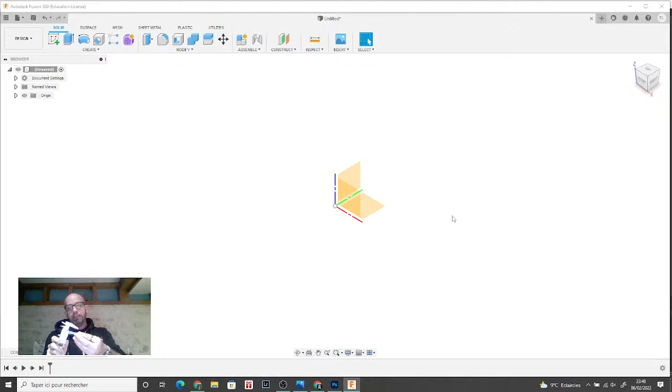So I have a blank page on my Fusion. I show the origin, modeler's best friend, the calipers, a pair of calipers, and first thing I want to measure the actual footprint of my part, and maybe not drop it on the floor at the very beginning of the video. So I want to have a footprint of my part.

I want it to have 16.5 millimeters from the top, from a side to another one, and the bottle itself is 13.3 millimeters, and the connection hose, valve, and we'll see what we can add on it will be the difference. So I'm going for 16.5 millimeters, and so I choose a face.

So I'm really starting from blank. I did it myself not to think about the project so that we can think together, and so I'll put my measure first on an axis. So now I'm trying to anticipate the positioning of my part with the origin, because I see there are some symmetries happening, so I will maybe need some mirroring, or there might be a clever position to set my part.

So let's say my bottle is 13.5, so I'll try to center my bottle on 13.5. So okay, I'm starting a sketch here. I'm going to put just a construction line at the beginning, and 13.5. Cool thing for beginners is that you can set calculations in the measuring field. So 13.5 divided by 2, right? So I should have half a bottle on this length, right?

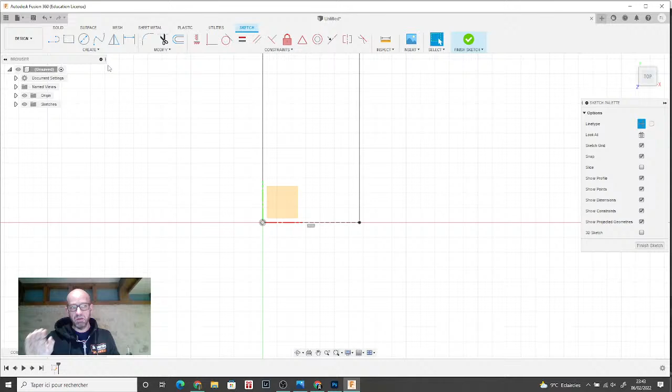We could either start with a cylinder and add a sphere on each side, or half a sphere on each side, or sketching a profile and revolving it around, which is my favorite option, because this way we could also decide which curve we will be following for the rounded top, instead of just getting a dumb circle or a sphere where we couldn't control the actual slope.

So let's go. We need also a diameter. Diameter is 4.75, let's say 4.8. So the radius is 2.4. Okay, I have a radius of 2.4. So here we go, my radius, 2.4. And now I'm going to make a horizontal line, which I'm not constraining. Don't set a distance, get a spline, and I'm going to set my curve. For instance, just need a few points on the spline.

And now I'm going to constrain. I want my spline to get flush with the body, and for that I'm going to hit escape, grab the handle of the last point of my spline, and if I want to finish my line flush with the body, I'm going to constrain my handle here parallel. Why not? That's a good start. I want you to be parallel with you, right? Okay, so that I'm sure whatever I do with the other points, I will be getting a flush line here, right?

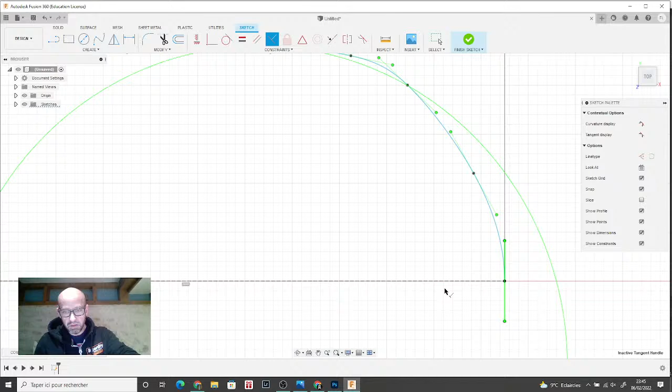And now I want as well this one to be perpendicular. I think it did it already. Okay, that's a good start.

We have a Fusion crash, right? That's how you start a live stream. What's happening? Hopefully it arrived in the very early stage, so let's start again. Fusion 360. That's how you start a live stream. Normally it's not my laptop performance, because I just upgraded my laptop a few days ago and added some memory to it. I'm at 32 gigabytes. Yes, Jared, isn't it how you start a stream?

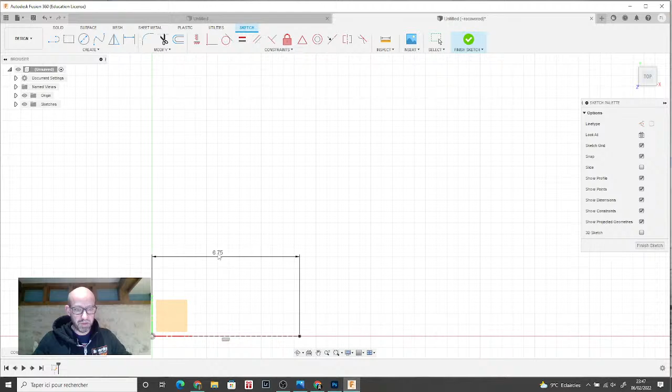I have a recovery file. Thank you, Fusion. Let's see. Yes, I just have my construction line. All right. So let's get back into it. Just going to go into the edit of my sketch. Have a measure. Okay. You come down. Okay. Just checking with measure. Yep. So my radius, I lost my radius in the accident. 4.8, that's 2.4 millimeters. Let's get back into it. 2.4, and

it's not very different from modeling on the bench. Even on Fusion you need a little bit of warm-up before triggering and igniting and getting into your thing. So just need a few points, don't need that many points. A common mistake I did and still do is making splines with too many points. Don't need that many actually to make nice curves. So I want that end handle to be parallel. Okay, and now I have constrained both sides of my spline. I can play with my points. Let's see.

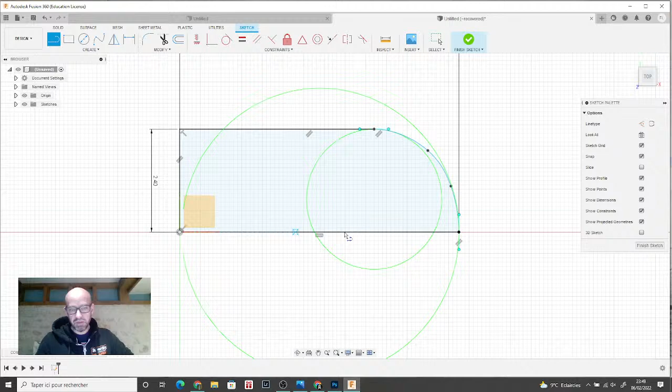Right, not bad. And to try to keep it simple and really newbies oriented, I need to make a closed sketch to be able to perform a revolution. And you see my sketch is closed. It's been taking a blue hue. It means that my sketch is closed. I can work some extrusions out of it or some revolvings. So I'm not going any further with this sketch. We'll be able to come back into it and do some improvements because I just had an idea.

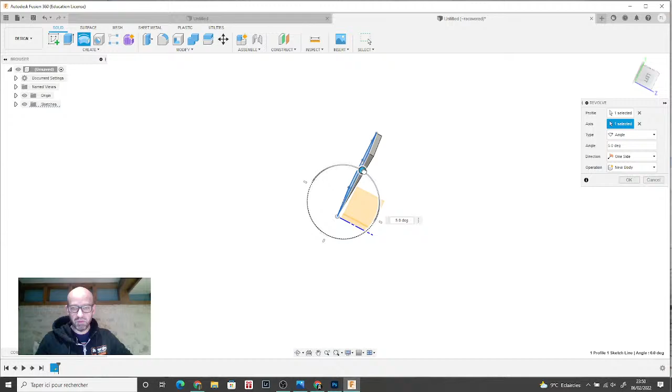So finish sketch. So if you entered my mindset, you see it's going to be half a bottle. So Fusion has been understanding that I want to use this profile. The axis is the center line, and here we go. We have a new body. I performed my revolving on 360 degrees, and that's a parameter you could choose if you like. Sometimes, if you have assembly notches or anything, making partial revolutions can be helpful. So here I'm going to full, right?

Okay, and just to show where I'm going for beginners, I'll be mirroring this body. My mirror plane will be that one, or I could use as well that one, and you see a bottle will happen, right? So further detail on the bottle, I have two straps turning around my bottle. Those straps will be also some locating plugs on the brackets which are on the roof, and I want to have better straps than those ones because they are a bit soft, and I think we could add some interesting features on them.

So as I have half a body, I cancel the mirroring and I'll make one strap, and with one mirroring I'll have my second strap, and there would be several possibilities to make the straps. I can, for example, displace a plane along the center line and draw a circle with a larger diameter and extrude it so that a strap can appear. Or what I can do as well is come back into my sketch and revolve a strap around the same axis.

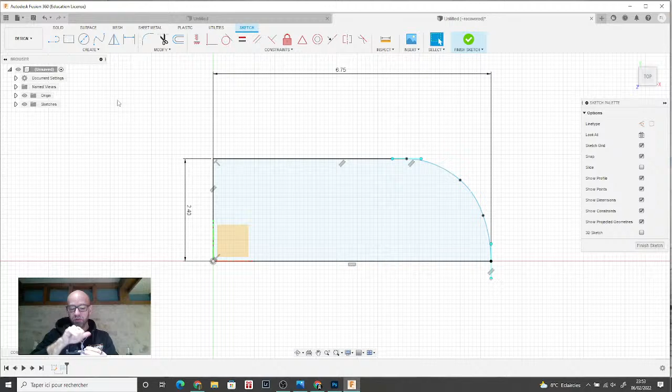The main opening of the well is above that section. There's a very narrow opening, and leg struts, so this area will be almost blinded. So I'll be concentrating on this area of the well, and a yellow bottle would be a nice feature around the green mess of pipes and everything. So I want to make some painting work on this bottle, and that block will be a good way to hold it. So a blind face is always a good way to plug in straight the supports, or to make a bit like a pouring block, or a sacrifice part that you could saw off in a second time, or even keep as such, because it's invisible actually.

So we want some straps. A very simple thing will be to add a rectangle here, which is connected to the body. At this stage I'm not constraining it... yes, I'll constrain it, it will be more simple to explain. So as it will be revolving, the height I'm showing will be the thickness of the detail, and the very first visible step when printing would be 0.1 millimeter. At 0.15 you have a good chance to see it and print it decently, and I like to go above 0.25 millimeters to be sure to catch a pin wash and have a nice sharp edge. I want a real thickness for my strap, so I'll go to 0.35 millimeters.

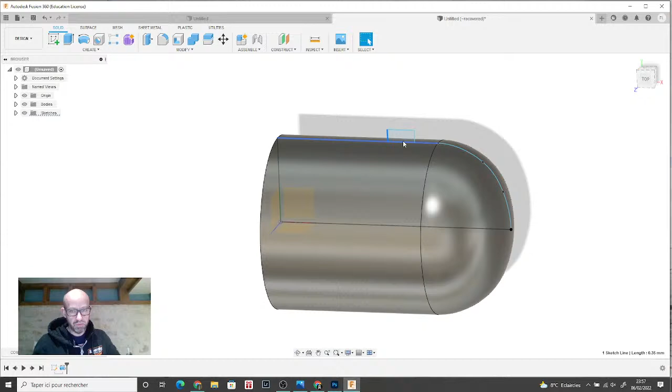Intentionally, I didn't constrain this length so that I can pull here we go, and increase my thickness just by eyeballing, because I don't have any blueprint of this bottle, so eyeballing will be part of the job, actually.

And what do we have next? I have an important feature to keep in mind, which I forgot: the location of the strap. I have my locating bed on the part, 3.3, just checking this. How much do I have? I'm just taking a measure to be sure I fit in my little bed on the part.

Measure from here. Nope. Sorry. Yep, I'm going to do it this way. I just want to check a measure. 3.5, spot on, I'm good. I'll be fitting. Okay.

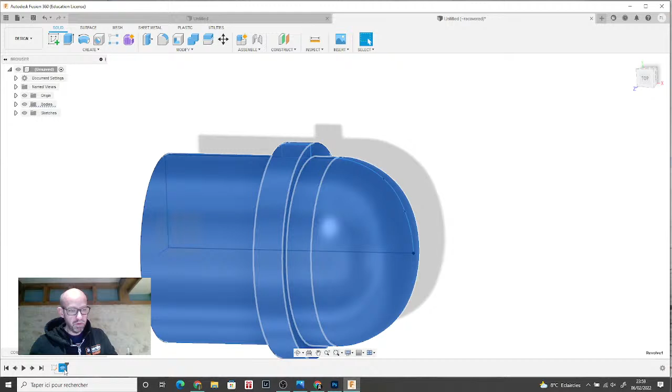I could have made, as I said, the revolution in one step, but I'm going to make it in 2 steps, and so I remove it. Single step. I've been touching something here. Okay, you see here, little.

I have a little mistake in my sketch. The rectangle I did wasn't snapped on the body, so I'm just fixing that up. Okay, I have one sketch, one profile, another profile.

Good, so I want a separate body for my strap, because I'm going to add a few features on the strap and a tightening clamp, those screws that pull on the strap and tighten them, and I don't want them to be perfectly aligned.

Perfectly aligned parts are too honest to be good, so I'll make one strap with its tightening thing and details, and the mirrored one will be mirrored as another body, so that I can rotate it a little bit and give an asymmetry and a more natural body. It won't be anything difficult.

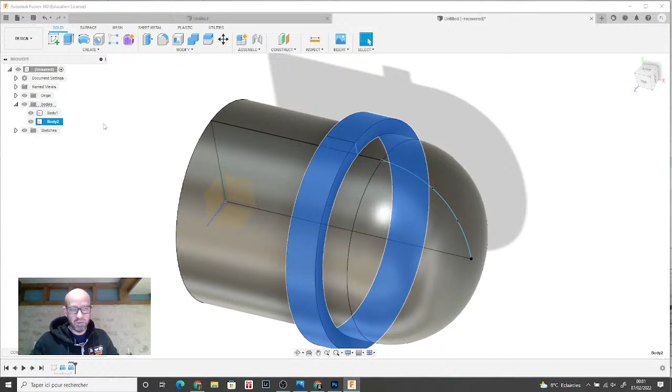Okay, here we go. So checking my bodies. Body 1 is the bottle, body 2 is the strap, right? So our strap is 0.3 millimeters high.

I'm saying that because I'm also thinking I need to keep thinking. As long as you progress, keep in mind you're not modeling the real part. You're modeling a model part, and you want to keep connected with real measures and what will be printable and paintable. You can make superb drawings, but if your details are too fine, they won't show up, and you won't be able to paint them with a good paint separation.

I like to have decent grooves to catch my pin washes. I want to have sharp edges to make nice paint separation. At this stage, I am already preparing my paint stage, and my advice would be for you to do the same, and hopefully this will make sense shortly.

So let's say we want to add a screw on top, so I'm going to set a plane here. I'm going to make it as simple as possible, sort of a cylinder. I'll see, 0.5 millimeters. That's going to be small.

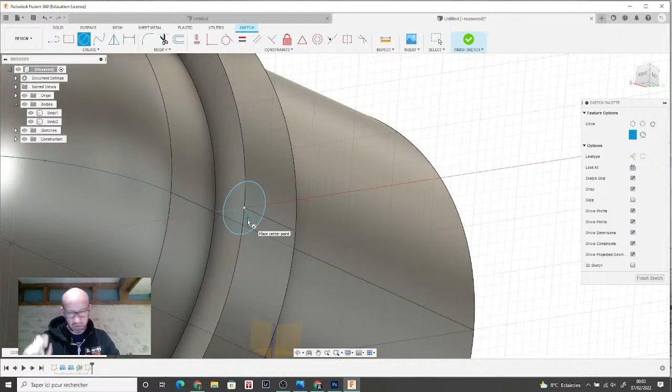We are not at this stage designing a real mechanism, we are schematizing. We are making a suggestion, and we keep in mind we're on a small part in an almost blank area. We are just trying to suggest something happening.

So I'm going to make a larger one, let's see, and I'm going with 0.8, and why not, in case I'm not sure, I'll use that sketch polygon. We'll see if it can make sense. A polygon, or a 6 face head, is always a good way to separate a body from a cylinder.

From a screw, to give a sort of bolt head. It's to give some variation and also suggest there is a mechanism for tightening, or it could be a Phillips head, or a hex head, which is a quite visual thing, and it's easier to show up this sort of head rather than a screwdriver head. So we'll see if we use it.

So I start with that one, I'm going to make a join. You see, right? We're going to use, let's say, the larger profile. I want my hex head, yes, I'm going to take this one up, right? Taking up this one, and looking, 0.3 millimeters is a decent height.

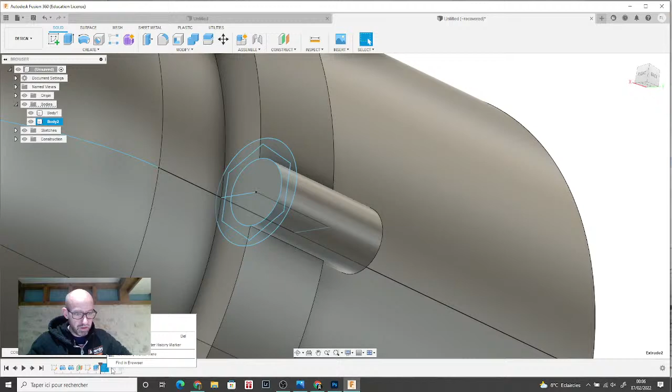I'm going to just hide my bottle so that... okay, just deleting this, and I start without my bottle so that I don't perform any merging of bodies or cuts or anything. Oh, I'm starting back.

0.345, so I'm taking half a mil. Yep, and for this one I'm going to put it at 0.25 so that I have a decent thickness here. I'm giving them as much thickness so that I have a clean separation for the print and also a clean separation for my pin washes.

This is a particular detail I want to replicate on the other side of the bottle, but also displace around the center line so that I have my asymmetry. That's why, if it makes more sense now, I'm making my strap and bolt on a separate body.

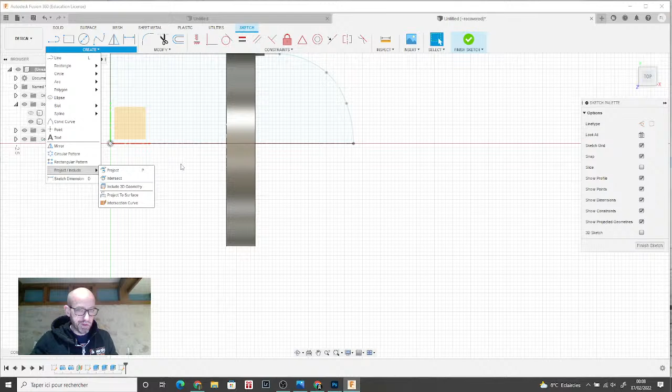We could have fun with, let's say, adding a little visual detail. I'm going to create a sketch here. I'm going to project this face so that I get its geometry.

Yep, I have my two lines. I want to make... I don't want the other sketches. Right, so you see I'm snapping the center here. There's a little bit of offset - that's something that happens sometimes with projections, you get a little bit off.

I'm thinking of my next steps. Yes, I'll keep it simple. I finish the sketch, and this little line I want to project onto the ring here, and for that I need to create another sketch.

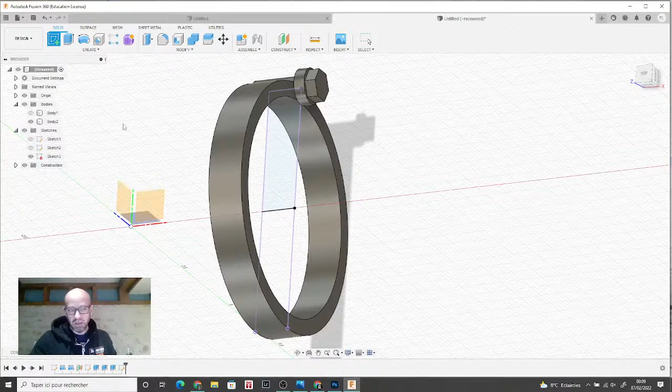Projections are a little bit unintuitive on Fusion - you need to have a said line to project on the face. You need to create a projection on a new sketch; you can't contain both the original and the projected line on the same sketch. It's a habit to take. I don't know the reason, and it's not very intuitive, I'd say.

So I want to project to surface. I project on my face here. Which curve? The curve I just drew, and along a vector, which is my blue line here, and you see the projection appears. I'm good. And now I have this line.

I'm going to make a groove along this line, and afterward I want to make a pattern of grooves all around my ring. For this I want to introduce you to a cool feature in Fusion. It's a cool feature because it's handy, and also it's a first step in learning another function.

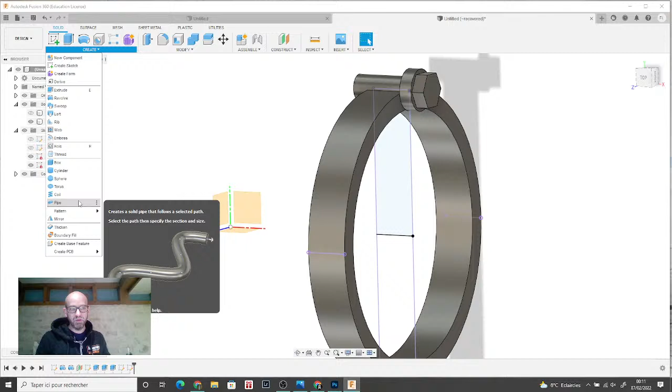Which is a sweep. So the pipe is actually just making a pipe along a path, which is a line we did, and on the pipe you can choose a circular, a square, or a triangular section. Actually it's not more than a sweep of that section - a square, a triangle, or a circle. It's just a sweep where the profile has already been done by Fusion, and it's a good way, I think, to start with it and to start thinking for future projects.

Where will be my path? Where will be my profile to sweep? And where should I locate my profile at the beginning of the sweep? So it's a good way to have a few trials with the pipe tool, and then go much further and be much more disciplined or much cleaner with the sweep tool. But starting with a pipe is quite handy, and you get a quick result with it.

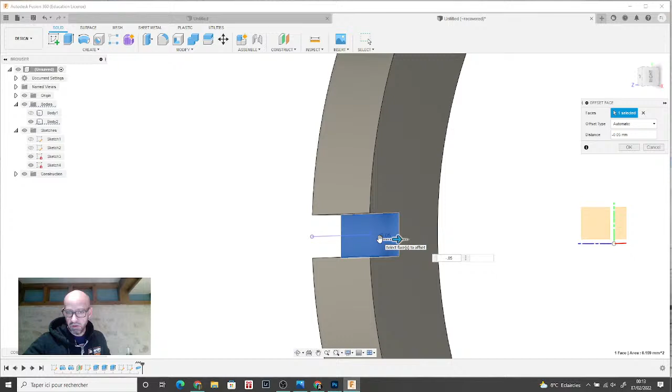So I did my cut, and with a press pull I'm going to see if I could dig a little bit more. Yep, I'm going just so it's about 0.15 millimeters deep now.

With a rectangular pattern, you just need to design one breaker, and then you multiply it on the horizontal and then the vertical, and boom, done. It's a really effective tool in Fusion.

And the circular pattern, here you'll see I could pattern a body, but also I can pattern a feature or something I did, and that's what I'm going to do. I can choose to pattern the pipe cut and the press-pull I did, but I could also decide, because at this stage they are simple, to make a pattern of the faces I've created.

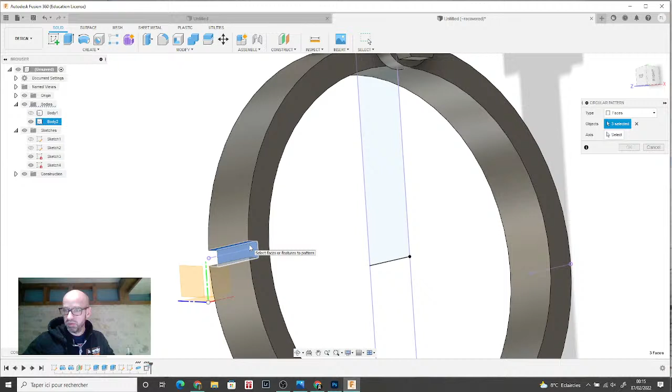You have the choice. Sometimes in the circular pattern, some functions create bugs. For example, the fillet features can create problems in the circular pattern. So when they're simple, just picking the faces is a safe way to make a circular pattern.

So I chose my axis, which is the center line. Here I'm hitting the little key, suppress, and you see some tick boxes appeared. I can decide not to show a few of the repeated faces, and I'm going to multiply them.

Let's say let's start with 20, not enough. 30, could be more. 40, and I have something which looks quite regular. That's why I hit suppress, just not to have any face issue or hole in my print. I'm not sure, just to be sure not to have any problem.

And here we go. Have a little cut here. I could remove one more maybe, or I might have created a separate bolt.

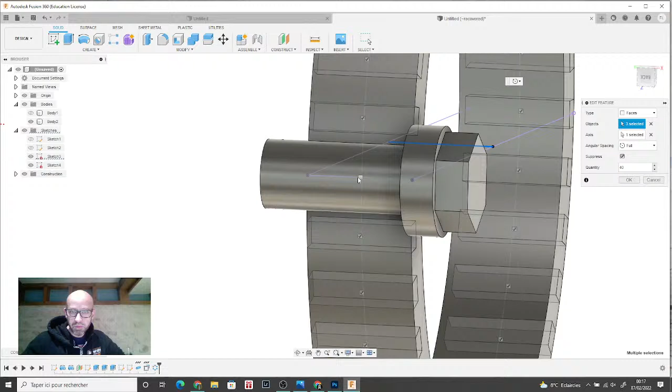Let's see. Now I'm cutting through my bolt here too, so... suppress. Okay, and I'm going to, where's my bolt?

Which is a cool thing, is to keep the history line, and so here, moving backwards, I'm going to edit and create a new body. Going there, create new body. In there, a new body - or I could have kept the join and hidden the ring, not to get them all together.

I'm making my bolt by a join. Where's my bolt? I hide the bolt. I'm going there. Right, and now I have my ring. I can add my bolt after the cut.

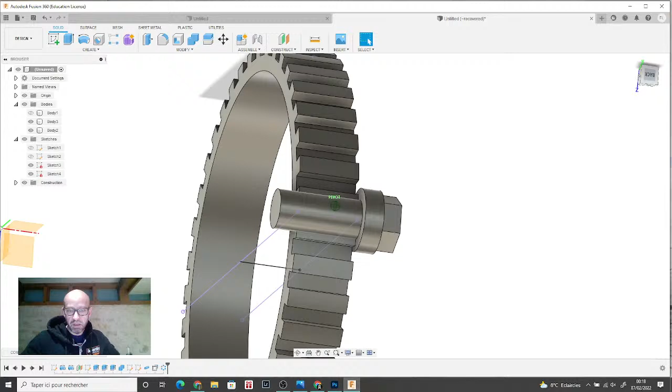No harm, I don't need to, and maybe I'd like to have a plane. I'm going to show up my sketch.

The idea was, which side was it? I don't like the fact that my groove is going from one side to another. I'm looking, where's my sketch? Here you are.

So I'm going back to my sketch here, and I have my body. I'm going to edit my sketch, and I'm going to look for the center here. I just draw a construction line here. Why is this construction line in the middle?

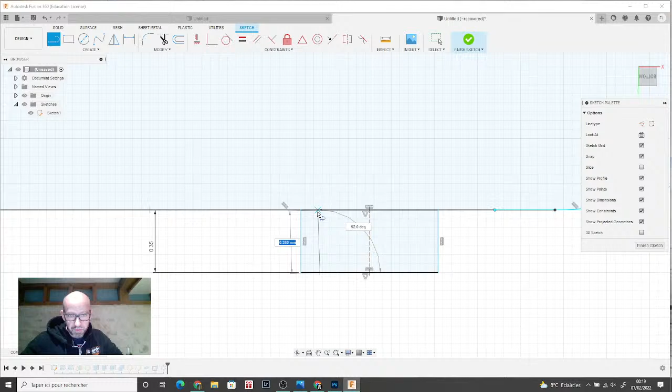It's a good way to work a symmetry, because so that I put an edge here, looking to snap 90 degrees, right? Have a profile, and then mirror on this line, so that I have it on both sides.

And if later on I decide to pull my sketch - just by eyeball my width - I'll keep my symmetry working, and I don't need to. Or the other possibility would be to use the constraint tool with the equal, constraining this side equal to the other side inside. But in both methods, it's a good way to keep your sketch manageable, and by further modifications keep a tool of symmetry at work.

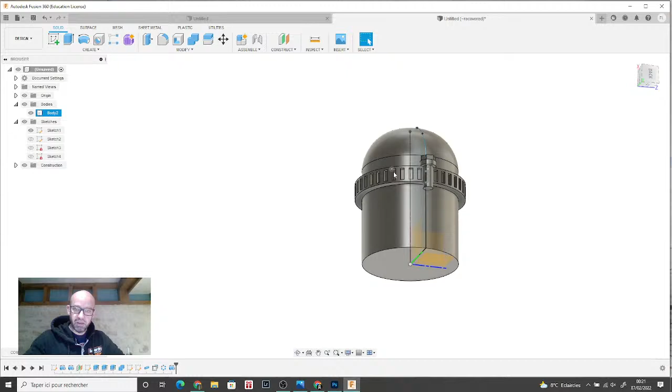And I again made a mistake, because I have one body in the end, which is not what I wanted. So I hide my bottle, and now it keeps in memory and joins things together. So just delete. Going to make it simple.

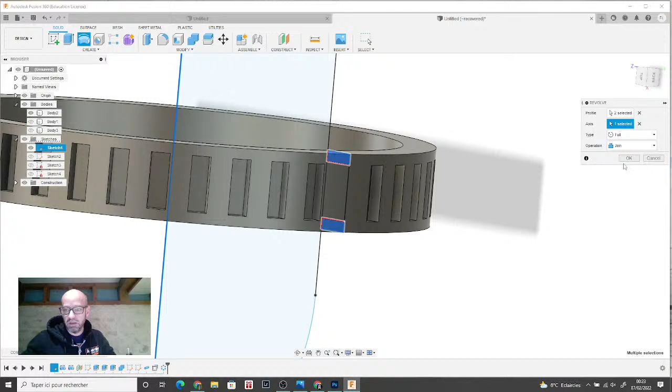So I'll perform my revolve again with only my ring axis U, and it's a join. And now that I don't have my bottle, I'll keep it separate. Right.

I select new bodies. I don't make a join because I want my rings to be still separate ones. If I select a plane, I could either select the face if I would be somewhere in the construction space, or this plane. It's the same because I just located it on purpose. And here we go. We have the bottle. We have our bottle.

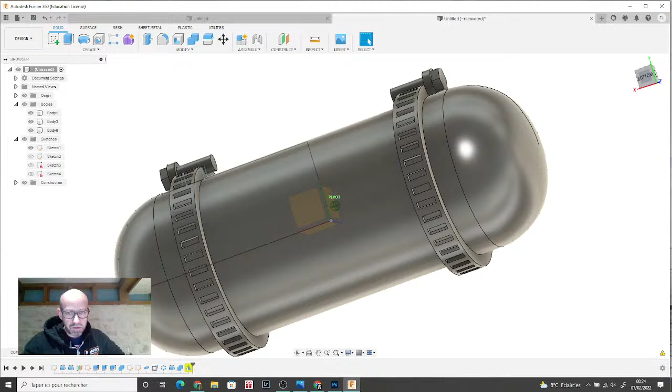Why do I have... what does it say? Compute failed. Yes, seems to work though. Let's see. I have 3 bodies. Edit feature. I'm going to pick U and see what happens instead. It's maybe because earlier, if you remember, I had something happening with my projection. Maybe that, not too sure.

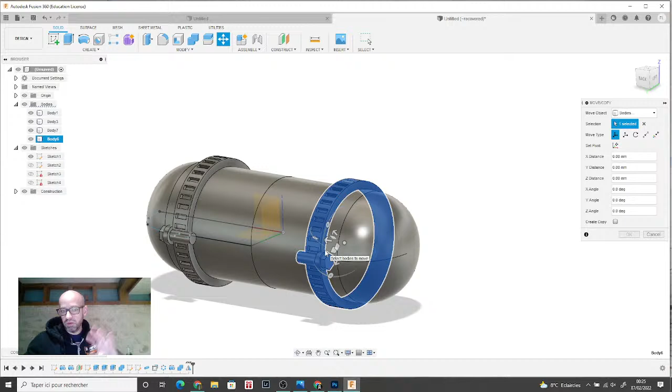So I have 4 bodies, and now, because we like to give some natural aspects to our drawings, I pick this body, move type. So I'm just making sure here that I'm well centered. Sometimes Fusion will help you and find the natural center of your part, or sometimes if you have difficulties you might go in the move type and go for only translate or only rotate instead of the free move, which gives you all the functions all together.

Now it seems to have worked quite decently, so I'm just going to turn that guy a little bit to be visible from the same point of view in my wheel, but not lined up, to give a little touch of natural, because that's one of the main difficulties. Especially as a beginner, still early in your progression, any opportunity to give an asymmetry or a touch of natural will help you not to have too artificial a part. You like some buttons to be switched or turned in different ways, or sometimes all of them pushed in a way and maybe the last one just up, or just some hints of natural or accident in your patterns will just make a natural touch.

And now we should be fine. I'm going to merge everything. There we go. We have one bottle, and now we are going to work on one of both ends. We're going to work the connection line, maybe a gauge or a button or something. We'll see. If you have a view, I'm not sure the laptop camera will show you, I have a little pipe there. Normally I'll be adding some LED wire in there. I have some 0.28 or 0.25, I'm not sure, LED wire, some 0.3, so we'll see what we use.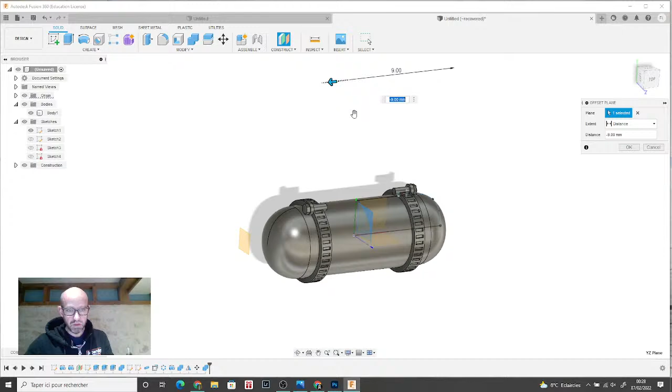I first want a flat plane on top of my bottle, so I'm going just to make an offset plane here. Offset plane is something you'll be using quite often. I'm going to make a sketch and just a circle which I'm centering on the origin. That's why it was good at the beginning to start centered on the origin. I just want to make the start of our assembly, so I'm going to extrude a cut on top here. Making this maybe a little bit wider, not bad. I'm going to add a fillet. And now we can start and build up some details starting from here.

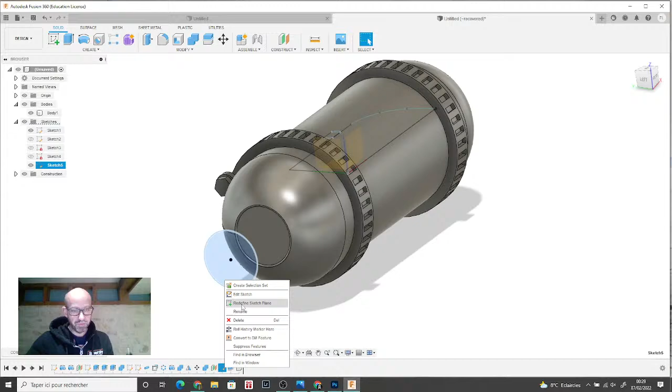I'm thinking out loud. I want my LED wire to fit somewhere inside, so it might be a good idea to add on this sketch a circle of 0.4 millimeters, which is 0.3 for my LED wire plus 0.1 for tolerance, so that I can fit my wire in there. So I'm going to 0.4. I have some room. I'm going to make 0.5 so that I can even work a bit thicker wire, or even a 0.3 would fit, but I have the choice. You see, 0.5, I have some decent room around to build up my hoses, so let's start from there. So how far am I?

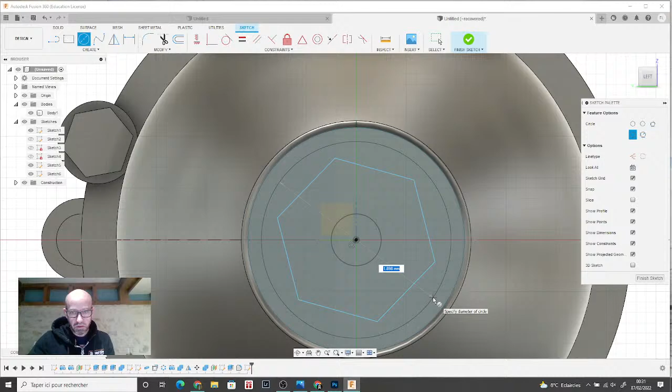Now I'm going to start with a sketch that I'm going to make here. I'm going to make a polygon. I see my bolts on the left on my screen. I'm trying not to line up my polygon faces, just to try and look accidental. I'm going to make a circle here, and we'll see where we go next. So on the base of an assembly, I can imagine a circular plate on top of which I have a large nut, for instance.

Now it's time to see. I'm going to go back to my sketch here. I'm thinking now of my overall dimension, because I'm building up the last tip of my hose. I need 16.3 millimeters. I'm going to the very beginning of this sketch. Let's see, how could I do? I'm going to edit the sketch just so that I have a view in the background. I said 16.3, I think.

16.5, a better measure. 16.5, right. And now, see, I know that I can move up till there so that I have a reference, right? So, what do we have next?

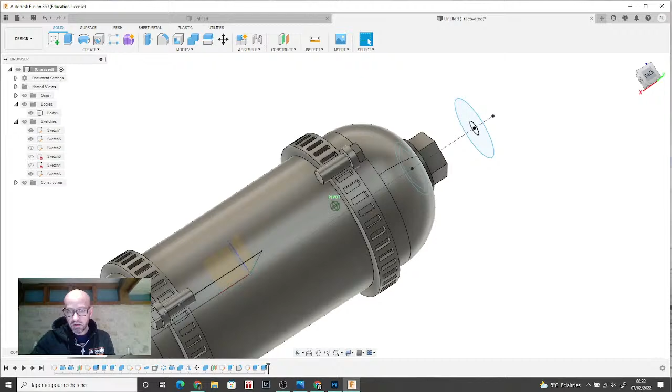It could be a good way to add a gauge. So if I want to add a gauge with an individual decal, I want to gather my visible touches on the same point of view, to be reachable by the same point of view. It wouldn't be a good idea, for instance, to make the gauge on this side somewhere here, as I have my bolts here visible on the opposite, because it's going to sit on the roof of my wheel well. I want to gather my details on the same side, so I'm going to make my life easier.

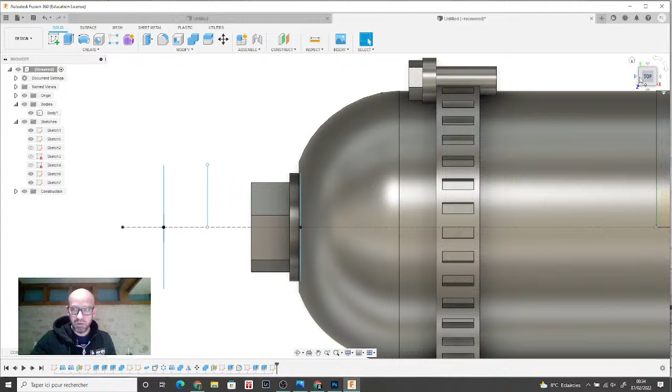Somewhere here. So I'm going to create a sketch on this plane, and I'm trying to use the most simple tools that I can. I'm just going to make a line here. You'll see in a second where I'm going. Remember what we used before? Pipe, circular. We have a tube now. Let's see. I'm 0.5 millimeters. I'm going to go safe, 0.7, 0.8. Yes, 0.8. Okay. So I have now, come on. Just this part will be the root, the attachment of my gauge, and I'm going to finish up the horizontal line now. I'm just going to hide you a second.

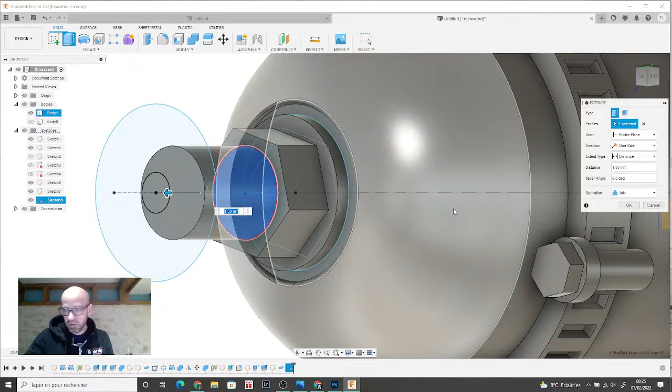Let's say I'm going to use a smaller circle right here. I'm going to move, for instance, till there. I'm going to join. That was my gauge. Yeah, not bad. Here. Now I have a separation just to make it a little bit more visual. Where are you? I want another bolt. Polygon. See, I'm looking at the other one behind. I'm just trying to find something natural and not aligned. Yep, not bad.

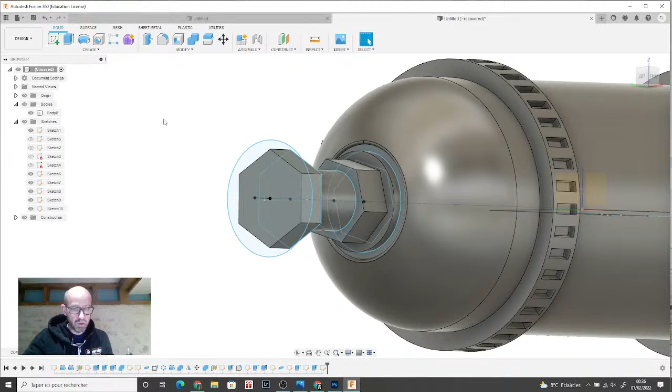Extrusion. Let's go up. Okay. And this detail. Finishing. Loop. Yep. And can I fetch this point? Nope. Right. Okay. Not too bad. See, I don't have much reference other than this part, so I'm just looking to break the cylinder contour. Bolts are interesting details. They can catch pin washes, dry brushes if you like, or they just make an interesting variation. You don't want something too regular, and make sure you look for a bit different sizes, different alignments. You want something accidental to happen. So I'm forcing myself not to go too regular in shape, too regular in size. When you don't have much clue, you want to build up something natural and a bit random.

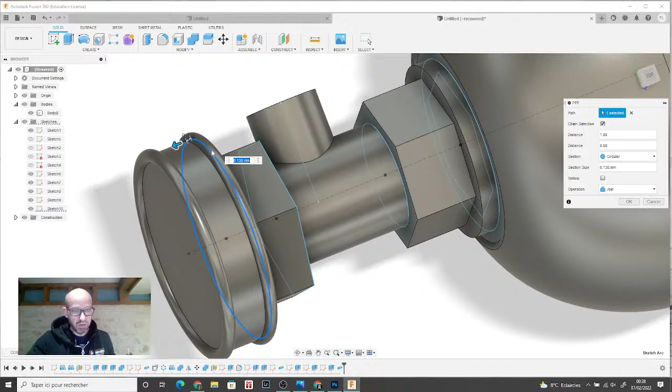And there, a finishing pipe again, and you see with a pipe you can give a finishing touch with a join and give again something to be caught by your pin washes. And before I forget, because I'm very good at forgetting stuff, I'm going to pierce my hole as a cut, taking two sides because I don't know where I am. Remember I did this circle for my lead wire, and now I'm making this extrusion so that I'll be able to insert my wire inside. And yeah, not bad. And now let's make a gauge over there.

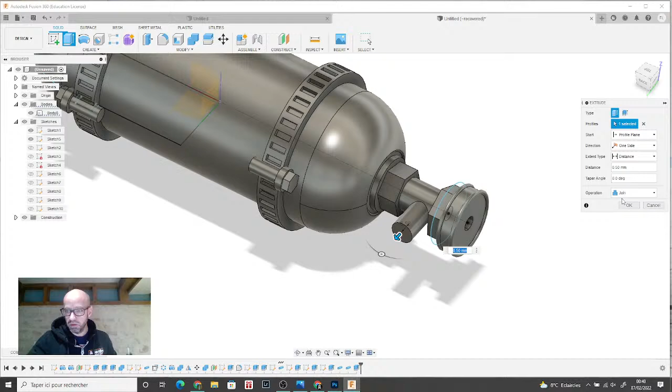Do I have enough room? I'm going to give it a bit more height. So I'm checking my face here. I'm going to extrude it. It was a pipe, so a pipe is along a path. So I could either now extrude this face, or if I want to modify my pipe tool, I should go into the sketch, extend my path, and normally it would modify and extend my cylinder here. So I'm just going for the extrusion. I'm going simple there. And now we want a gauge.

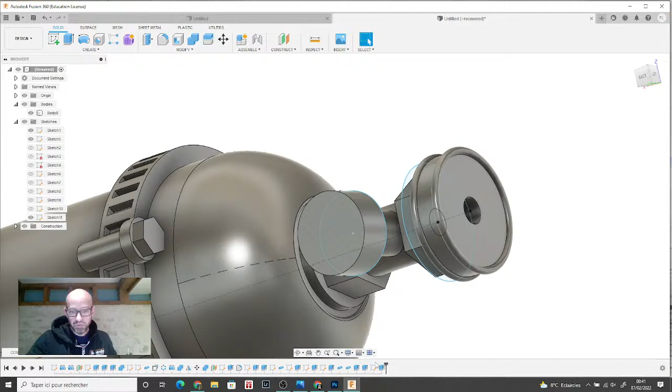Let's make a circle. You see, when Fusion recognizes a circle, when you hit the center, you feel a snap and have a circle showing up. And now I'm making that guy. Finish my sketch. I'm going to take a measure. Radius 0.75. Yes, it's good. I'm trying to remember what I have, because I'll be using a decal from my friend Tomanis. Normally I should be fine with this size. I'm pulling you up. So I have my gauge. I want to give it a little bit of depth. I'm just going quick and simple. Another circle, a contour. I have 1.2 millimeter.

Select you and push you back to give some depth. And fillet. Nope. Yep. And here we have a gauge. And I find I have too much of a blank face here. I'd like to add maybe a little, just a thin nut over there to finish my contour.

Polygon. Up. Let's go. Up. Just to give it a more natural look of connector. Nope, not more than this, because I've been pushing a bit away. I have some room over there, so it won't be an issue going a bit further than initially expected. No worries. Okay, so we have our body.

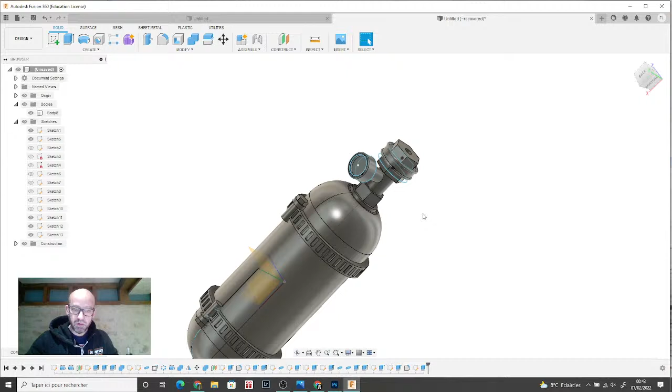What time is it? We have a little bit of time, maybe. No, we're good. I was thinking of maybe a closing handle, but no. We'll keep it, we said we'd make a simple project. Let's keep it simple so that we'll have time for a few more talks about the slicer program. And now, slicer program. So keep in mind we're making a part which is due to be printed. I'm going to remove the sketches we don't need anymore.

We need to have a strategy for printing, and if you're here from the very beginning, you heard me talk about it with my friend Jared from Bone Fragment. So my strategy will be to use the blind face of the bottle on my assembly. So if you joined a bit later on, that's the wheel well roof, the bottle, and it will be sitting on the two brackets here, which sort of bed on the roof.

So I have a blind face down under, and there I'm going to attach a little block where I'll be able to connect most of my supports. Maybe one or two will be attached to the dome of the very part, but not many of them. And this block will be also helpful to hold my part while painting it. So let's go. Let's do this block.

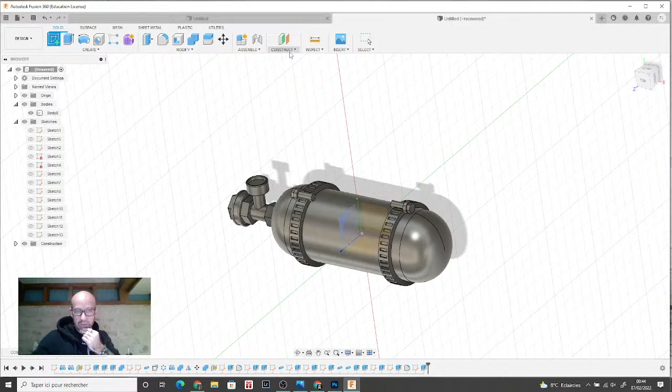I'm going to make an offset plane because I like to work on offset planes, because I need to keep the impression I'm working with actual paper sheets. So I'm working on a sheet under my bottle now, and I want a rectangle. I'm going to be using my origin, and let's say this rectangle should be enough there. A good idea was to be centered at the origin at the beginning, because now I'm going just to extend my rectangle a bit.

Here should be fine. I'm considering whether I should hit or not the straps. No factor. I'm going to go safe. And now I'm going to use mirroring to extend my rectangle and my block, and I'm going to make another mirroring. It's a function I use a lot. You'll probably do the same as you go further in your modeling. You see, so I have my block down under, finish my sketch, and now I'm going to extrude that guy.

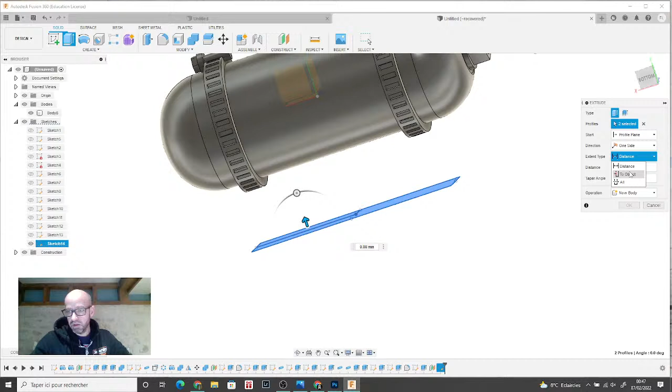So I'm going to start. So you could start from an offset area. I don't find the offset very easy to locate. I'm actually going to make it in 2 steps, but more simple. It's just a mindset. I'm going to start from my profile plane, and extend. You could go to the object. When the shape is complicated, you can have computing issues. Here I'm just going to go through the object, make sure I'm making a join. See?

Okay, and I'm going to reselect my plane and push it. I find it this way much simpler than working the offset start of the profile. I find it just much more simple this way. And here we go. We have a little block here, so that we'll be able to attach some decent supports. Probably I need a support or two just right here to support, and so we'll see very shortly, because as far as I'm concerned, I'm happy with my bottle.

This block will be setting it below my brackets. Maybe I'll need to cut a center line into my brackets. No big deal. Or I'll keep it as such. And seen from above, I think it's narrow enough. Yep. Just have a little doubt.

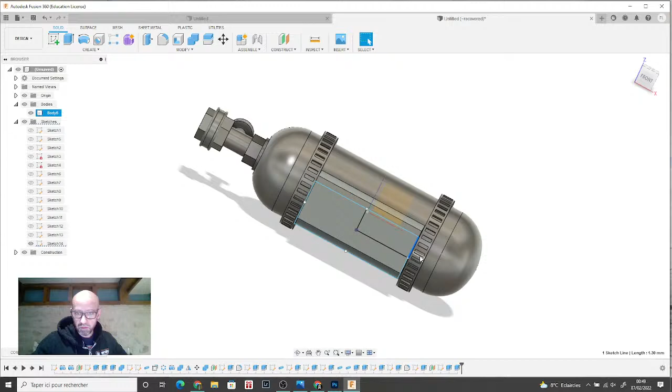No, I'm going to reduce it in size a bit. Up. I'm going to keep it just this way, so that I'm not jamming too much on my locating bed on the roof, and I'll attach some support straight onto the strap, and no worries. Yeah, I'll be safer this way.

Bottle. And now we want to go to the printing program, so I right click here, save as mesh. Just let Fusion do his thing. Just make sure I have an STL, millimeter, everything's fine normally. And here we go, I can save my STL in my mess of folders.

Front fuselage, I'm going to put it in this folder, and see, it's working here. Let's see now. I'm going just to check in my folder if everything is good. Well, bottle. I have a bottle. Good news. It worked. Right.

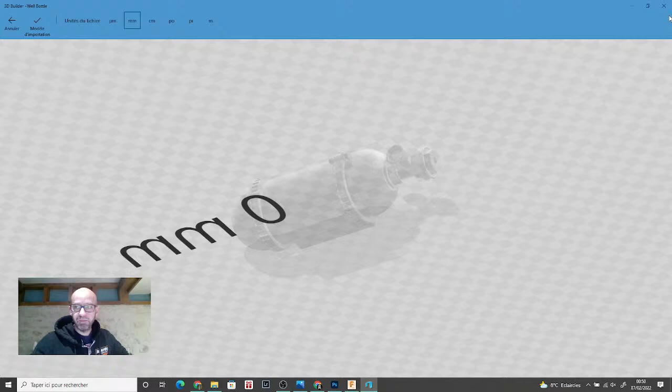So now, for you guys, if you consider going into printing, not Chitubox Pro. That's a trial version of Chitubox Pro, which is over now. As I said at the beginning of the video, I might... You want to continue? No. I want Chitubox. I might go and buy a Chitubox Pro. I'm not too sure yet. I'm still considering. I like its feature. I like the fact that it's an evolution from a software I know since 2 years, so I'm familiar with it. But also Lychee is a bit cheaper, has nice features too. So I'm not too sure yet.

Meanwhile, I'm still using Chitubox regular, which now opens with the last file I did, which was a row of connectors. So let's erase it.

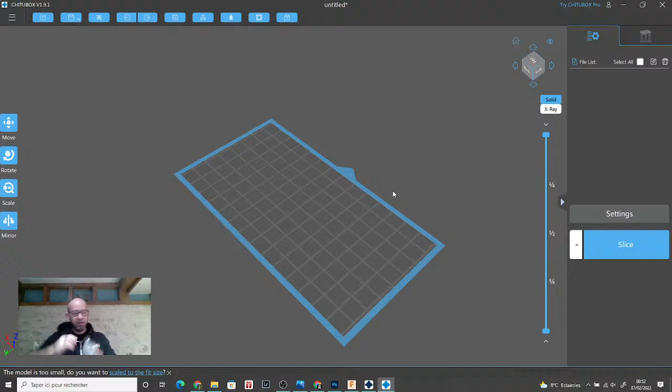So when you have set your slicer program, sorry, getting thirsty, should have taken something more elegant than this, but I'm sorry guys. It's ugly, I hate water.

So this right here is my build plate. It simulates the printer's plate usable area, and I'm going to open the folder, look for the part we did. It was in my Well Bottle. This right here is not a dildo, it's a tiger cat nose. So, Well Bottle, and here is our bottle.

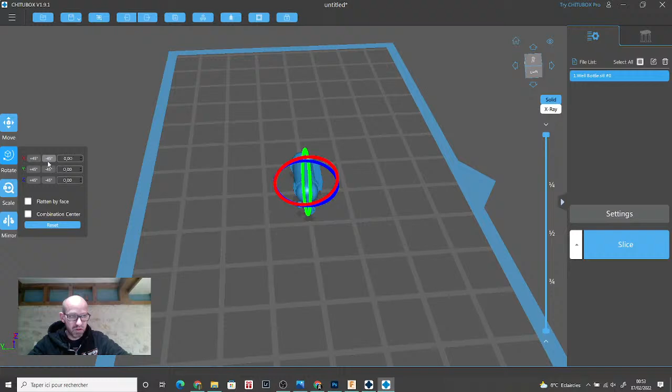So, first thing first, we did a little block here to be able to set some of our supports, and we need to orientate it towards the plate. So there is a rotate tool, you see, with different handles, and so I'm going to rotate along the red circle, and I'm going to use 45 degrees. Towards the other one, of course. Up. Now it sits horizontal.

And now that's where you are going to enter a new world with printing, is how to orientate your parts. There are different strategies, there are different ways of thinking. There is not a strategy, in my opinion, that will always work. Each part is different, but you have different tools, different drawers to look in. First strategy, which looks logical, will be to sit horizontally.

Another one would be maybe logical to go in the vertical, but not with the support we did. It could, but I'm going to remove the handle. This is a plate here around where the part is sitting, and the part will be on supports. I'm going to put some randomly. Yes, Chitubox sees only one support.

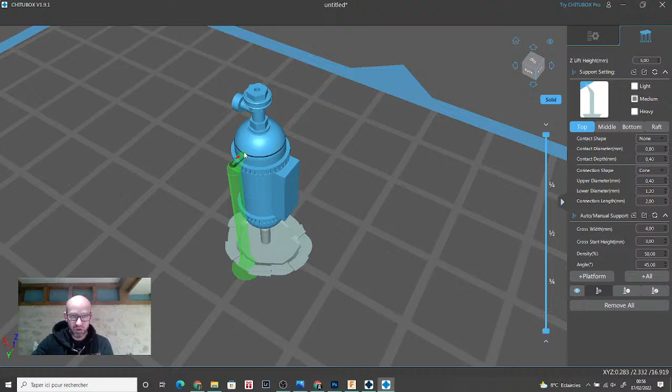So at the beginning of the print, the first layers will be straight on the plate, and as the print goes on, the layers will be going each one above another, and the process will be going from the plate to the top of the part in this direction. So the build lines will be parallel to the plate, you see, and printing vertically, you would risk having horizontal lines, and the other risk we'll have on such a plate will be, especially where you have some domes or spheres, some artifacts.

So if we decide to set our plate back on the horizontal position, yes, I want to remove the support. You see, now my build lines will be horizontal. Here they'd be much more visible. But as my part will be created from the plate to the top of the screen, I'm in a good position here to have a progression from my gauge.

When you're thinking of your printing strategy, you want to have a picture in mind of how your part will be building up, and you want something continuous. And for instance, here I would absolutely need some supporting, because this area would start in an empty space, and in printing it would be called an island.

And you don't want an island in your print, because that would be a little chunk of resin which, not being supported, would remain stuck on your FEP film inside your vat container, and you'd have a buildup of resin on your FEP, and anything going upwards would end up not being printed or being melty or damaged or not going good.

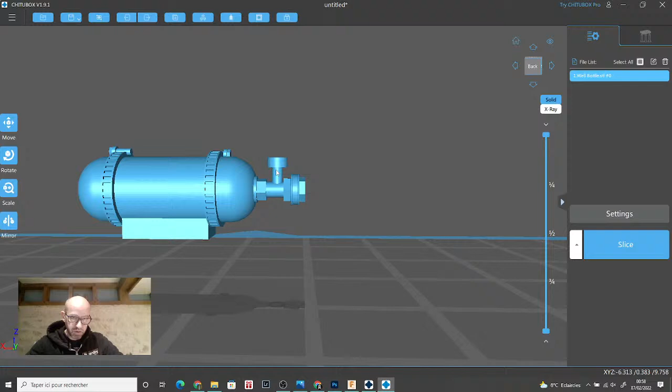So you want to have an idea of where your islands are when you see a part, and here on the progression I'd be fine. Here the gauge, you see there's a cut in the profile, but this part of the gauge would act as a support for the gauge, so it would be fine.

So it's a strategy we could try. So I'm going to just replicate the part, because also you won't be using much resin for a single part, so it's always good for the self-learning to print different strategies, so that you can figure out if you were right or not. You can expose yourself to happy accidents, or just realize you're going wrong because another strategy was better than

you expected. And in the end you end up with a mule part for your testing, and in my opinion you never make a mistake trying 2 or 3 strategies for small parts. If you have room on your print bed, go ahead, try a few, and it's always good learning to compare, to see if you were right. It's always a good idea, honestly.

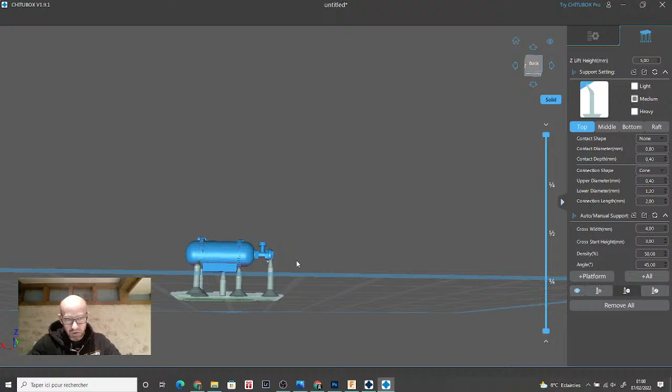So I'm going just to support this one horizontally. That's not my favorite position, so I'm going to add my supports just to see. I'm going auto supports to see what Chitubox proposes, and I'm going to set my supports a little bit better here. I'm removing this one. Where is this? Where is he going? Those ones down under, just perfect. They're fine.

I'm on medium supports. If you want to see my settings, it's the moment to hit the screen capture. That's the main settings I use. I almost never change them. That's my raft, the raft area here. The raft is the base here. I use this setting with a scale ratio of the footprint, and that's maybe the only setting I happen to dial according to my parts.

Sometimes 120% isn't enough, sometimes extend them. You want a nice chunk of resin. If you go for a too small raft, you might have some adhesion issues on the burn-in layers in the first stages. So go for a decent raft. Afterwards, it's always good to have a good raft to handle with your hands to pick your parts. So yes, for this part, 120 is fine.

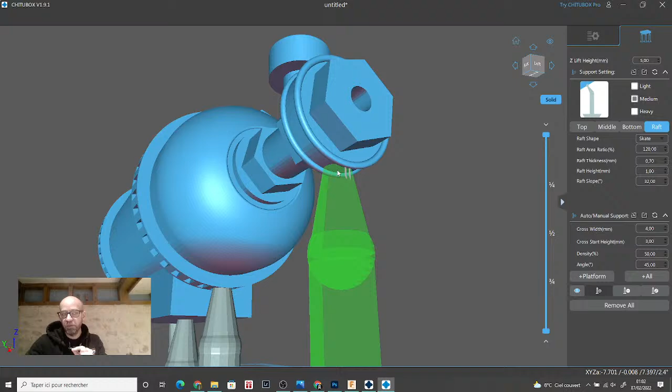And so I'm going to pick a support. I'm hesitating here between using a medium or a light support. I'm going to use a medium one. I'll be printing this part at 0.2 millimeters. I think it will be more than enough. At 0.2, my light supports are not very catchy. I have a little bit of issue with them. I more often use light supports on very fine areas on 10 micron prints.

So here, see, I'm just touching this line, so I'll be sure I'll be catching them. No worries. I'm not going too far ahead of the part. I'm making sure I put my support and do not extend to a position where it would be visible. You see? And here I'm going to add another 1, 2, and 3. You don't want to be afraid to add a few supports.

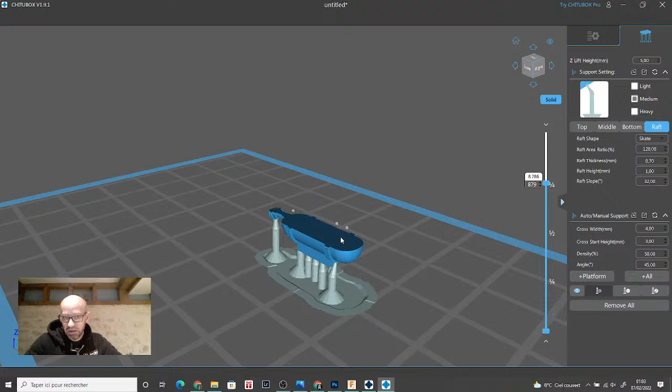And this position is not my favorite one for my bottle. Also, I'm going to try and illustrate. You see this handle? It will be all my layers, and that surface here will be a layer, and as you move up you add layers and so on, and you see it's quite a big surface, and putting an angle could be a solution to reduce this surface.

And also, what happened? Okay. Always happy to have a crash of Chitubox. Yeah, recover, automatic. Automatic backup worked. Maybe not totally. It's one of the reasons I'm not sure I'm keeping Chitubox. The crashes of Chitubox happen on very heavy files. I wouldn't have thought it happened on such a simple file. Actually, it's the first time I see that happen. So I'm going back to my supports.

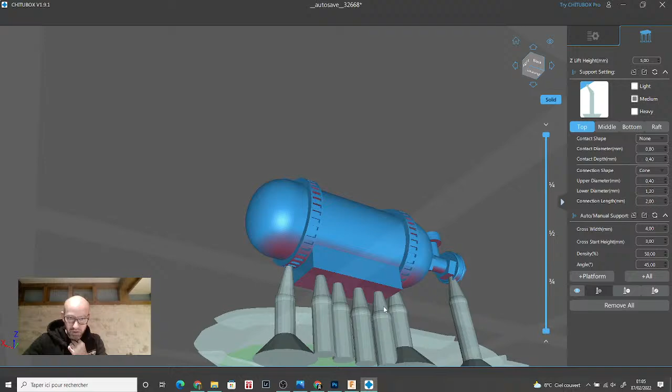If you guys have followed my page for a few months or so, maybe you remember my Seahawk seats, which were quite heavy in megabytes, and they caused me quite a few crashes on Chitubox because they were heavy. Should be fine. I'm going to add another one here. Okay, so now it should be good.

Those supports, that particular one which I'm showing, and that particular one, I think I could not use them, but they are on the blind area. I'm not taking a risk, I'm keeping them as such. I'll be disciplined when detaching, and they won't be visible. So here's for

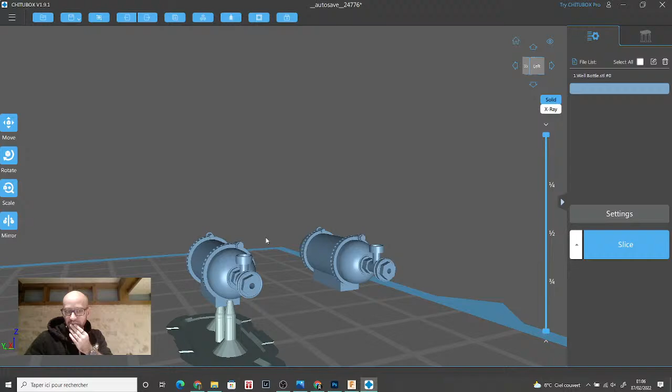Hope you guys feel my pain. What's been happening? Yes, there must be something wrong with my file. My bottle. I'm going to reselect my supports. I'm going quickly to make a new Chitubox file because something is wrong with it. I don't know what bug is happening. I'm going to start a new project and see if this happens again.

Open file. Strange, because when a crash happens several times, the same series of crashes, something is wrong with my file. So front fuselage, well bottle. Okay. Let's see. Rotating back into position. Right.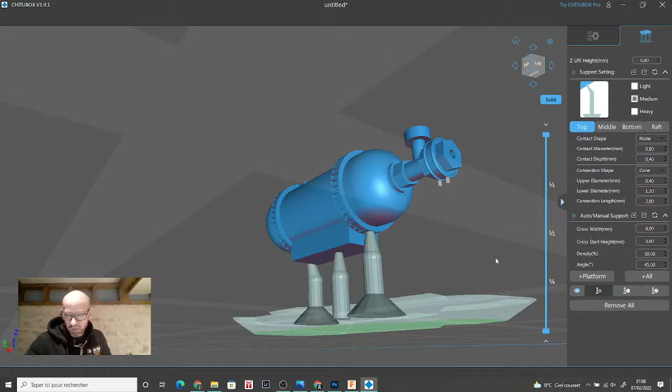So I remove this and these supports, and then putting it back right here, right? A few ones here, I block, and here we go. So let's cross fingers.

Yes. Something must have been corrupted on the other one. Let's put another bottle and try another strategy. I should have duplicated it just a step before. I'm going to try just...

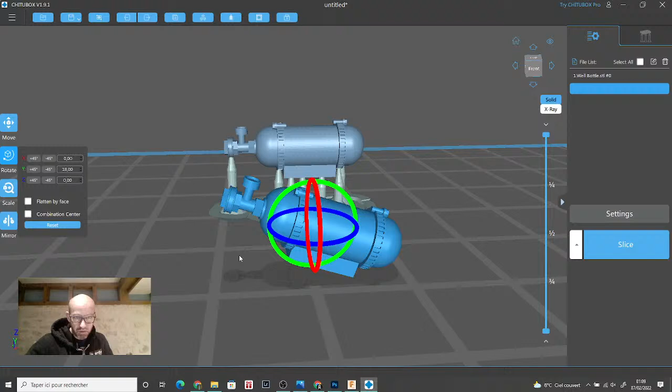The other strategy I have in mind is starting from the flatbed position, and tilting my part up with the gauge upwards. I'm just pulling the green. By doing this, I want to keep an image of my gauge going from the flatbed to the top. Should be good.

There are some key values you want to keep in mind, which would be 10 degrees, for example. 10 degrees on an axis, 10 degrees on the other one, and this one is probably not important around the Z, but a tenor of degrees on X and Y is often a good way to kill the horizontal lines and to concentrate the artifacts on the domes.

It doesn't always work, sometimes it does some good work. Even on square plates, if there are some artifacts which appear on, let's say, a flat or straight position, a tenor of degrees on X and Y is sometimes a good tool to get rid of many artifacts, or sometimes just to concentrate them on a particular area which will be easier to treat. Sometimes it works, sometimes not. It's something to try.

And, yes, 30 degrees is the other one I have in mind. There are 10 degrees, then the 30 degrees and the 45 degrees. Those are the main values I have the habit to test.

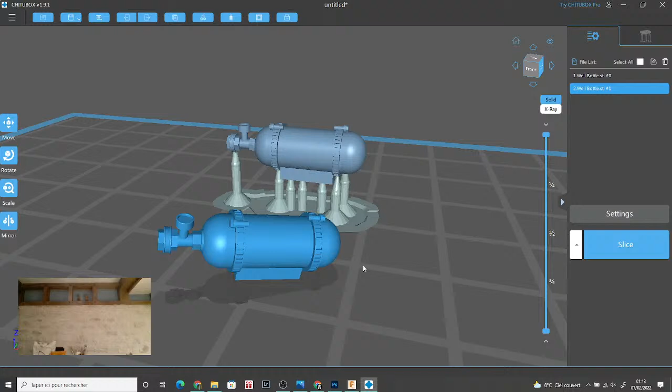For instance, I have a tire which I printed. You can imagine this face - each side of the tire would be a face of the dice, and because you have some details where you want the highest quality, you can decide that's the face I want to emphasize, where I want to have the better quality.

So I'll take this face as a dice face, and by doing such, I'm putting some artifacts elsewhere. Decide it. For instance, when I did those wheels, I knew that when tilting my wheels, I put my artifacts on the corners of my tire. So the 30 degrees orientation is good.

It depends on your layer height, and you have to keep in mind it doesn't work on all parts - it's a tool like another. It's not a 100% rule. It's quite difficult to explain.

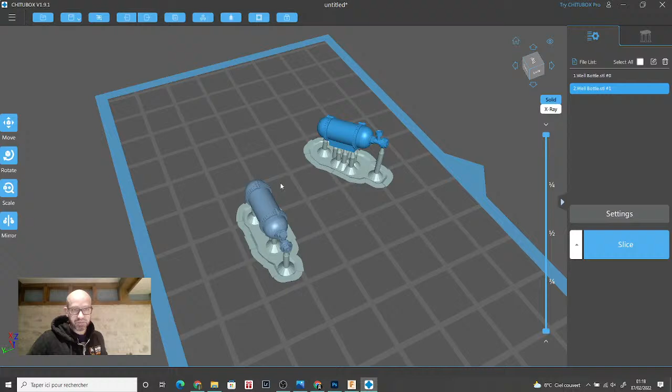Now I'm looking at this one. So I have 15 degrees, and I'm going to make a 30 degrees one. 45, I don't think it will be relevant or necessary. Rotate - no, I need to bring it apart. Up, rotate it. So I want to move up by 30 degrees.

One thing I'd love would be that Chitubox would let us type some text on the raft, because the difficult thing afterwards is to remember which were the orientation settings.

And so I want 30. Do I need 30 degrees on the X? Not necessarily, because it's symmetric, it wouldn't make sense. So I just - and, nope, up - and see, I have a little island here.

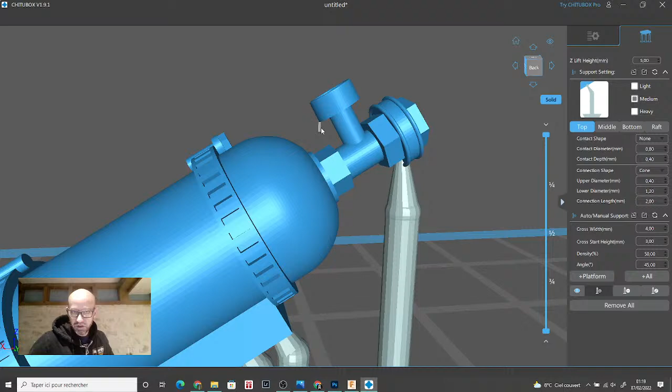That's why you want to have a look on the Chitubox. When there is that little island, Chitubox wants you to put a support here. So sometimes it's not necessary - sometimes when you have a very tiny space, you know that your little chunk of resin will be pulled. But here I do need a small support, and here as well.

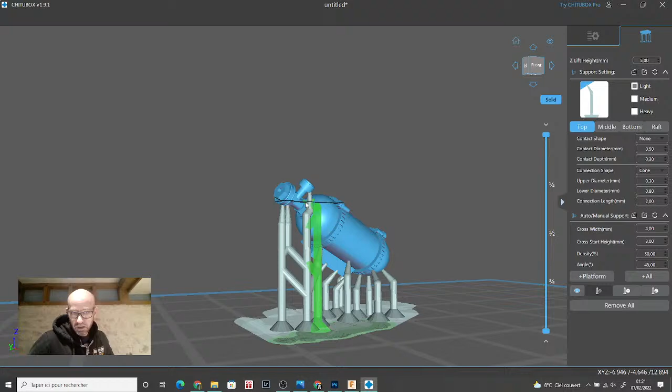We'll see how it goes. I'm going to put a light support. That's not sure I'm having a good idea here. And if I have to put a support, nope - I'm going to change a little bit my orientation and rotate it 30 degrees, so that now I should be able to reach my gauge.

Good. Also, you want to make sure that your supports are not going too close from the surface. Chitubox usually makes its way, but sometimes it happens to go very close to the surface, and you can have some support joining into the direct flesh of your part.

I'm going to see if I can just adjust a bit the position here. So you see, again, this position would be better, I think, artifact-wise and building-lines-wise, but I now need a support on my gauge. So, is it relevant or not? Not that much. You see, so it's never the same.

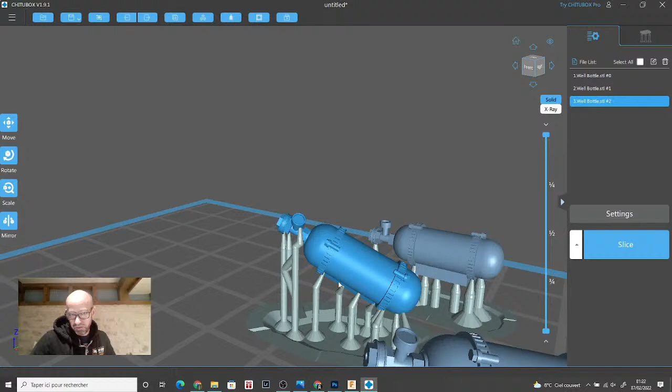A solution could be at this point to make a test print, see how my bodies come out, and if this 30 degree orientation gives the best results, then it would maybe be a good idea to cut the top of my bottle as a separate part, print it separately, and assemble it after the print, so that I can have the best body possible if the orientation is good, then make my connector and gauge with a better supporting solution.

So you see, a strategy is not valid for any part you make, and when performing your supporting, you can discover some issues such as this gauge, which can make you go to the test print. Even now I have in mind that for the final print I might have to modify my part because of the supporting strategy and this gauge, which is a little bit annoying me at the moment.

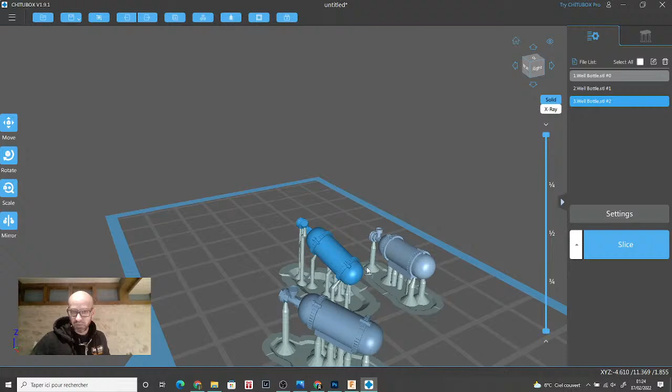And so I have a regular position, 15 degrees, 30 degrees, and the 45 degrees wouldn't be any help, I think. So I'm going to...

You know what, I always like to have spares. Spares are always useful. When I make spares in different orientations, you see I'm joining my rafts all together so that I happen to have a better adhesion on larger rafts - that helps being more organized when curing, so you keep all the same parts together. And also for the print, for the small parts, you like a larger raft, so I'm taking advantage and putting them together, as such. Up.

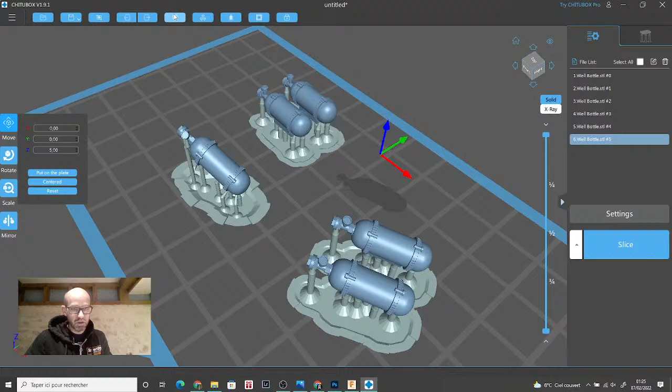And we're almost good.

And now, for people who come into printing, I'm reaching the final stage: the settings.

So that's a test print. I'm going to check my Craftsmen grey at 0.02 millimeters. So you can have lots of settings, all imported from Chitubox. When you select your printer, they suggest many different brands of resin or anything. I happen to use mainly 3 settings.

I set another one in Chitubox Pro Trial for 0.05 millimeters, but 10, 20, 30 and 50 microns is more than enough. You don't need that much settings. Resolution, size, and anything is something Chitubox or any other slicer knows. They just want you to tell which printer you use, and they'll import some presets.

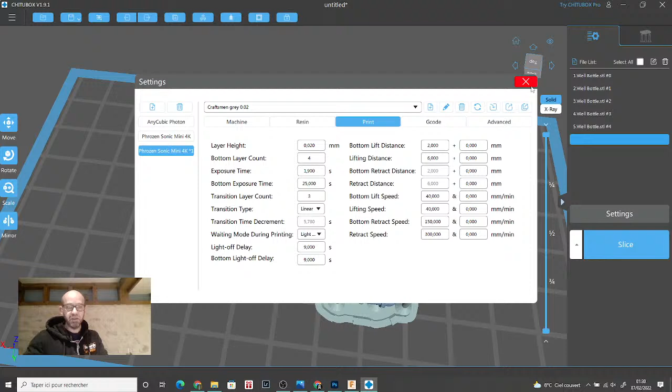So once your settings are good to go, keep them preciously in your parameters, and normally your printing becomes a straightforward thing. I have my settings on this quite safe now. I almost never touch them, and I've taken a bit of time to explain my strategy, but it doesn't take really long now. I go and hit slice, and what the program has been doing...

It has been performing a cut of 20 microns thickness, and our STL has become a pile of slices of 20 microns. You can see as I move up on the black screen, layer after layer, the different exposures done by the machine. That's what's contained in the file.

Now I'm going to save it, put it on my desktop, and that's the file I'm going to put on my USB key, which will be plugged into my machine, and we're done.

So the file is now ready to print, and you've seen from the very beginning to the end the process of sending an STL, a scratch-printed part, as David Parker would say—that's the whole process from zero to the printer. And when all your settings are done and fluent, when your workflow is smooth, it really gets no more complicated than this.

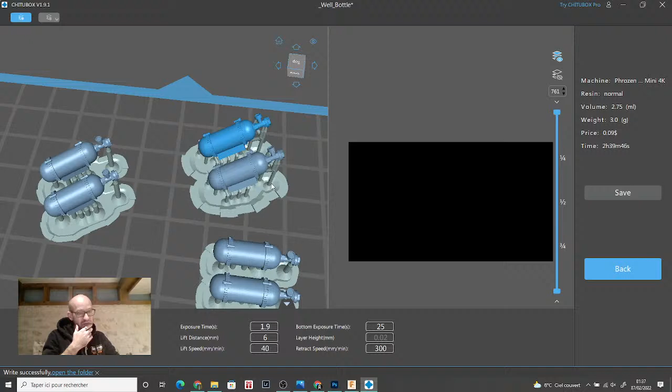peel-off travel of the plate, but also for the rest of the travel of the plate, I never set very fast movements. I don't know if it's good or bad for the wear of the motor, for the mechanical wear of the machine, as they are cheap machines. I have the impression I save a bit of lifetime keeping a slow move. I'm not too sure.

I kept my settings as such, as speed is not that much a concern for me. I usually have a bench session late at night and do my print while sleeping or while at work, and I have the feeling I could shorten my machine's life expectancy by going for too-quick moves of the plate. Not too sure.